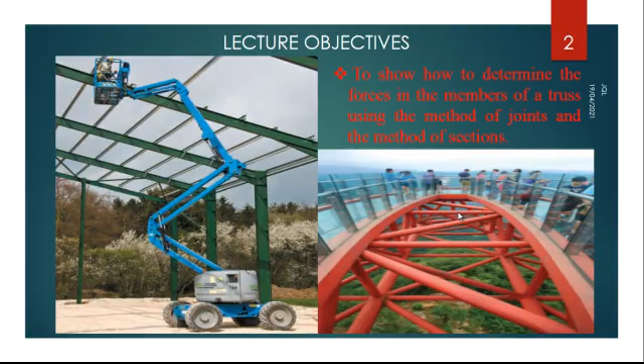Introduction. Definition: a structure refers to a system of connected parts used to support loads, such as buildings, bridges, dams, towers, and so on. Structural analysis is the design of the performance of a given structure under prescribed loads or other external effects such as support movements and temperature changes.

So as we analyze or design our trusses or structures, we consider the supports, right? Of course, you try to avoid those movements, and there's also the effect of temperature. But this course will not consider temperature changes. The component that includes temperature changes on a body or structure will be done, I think, in the second term, under strength of materials.

Structural engineers analyze and design new structures, investigate the capacity and serviceability of existing structures, develop retrofit methods for existing structures with inadequate capacity, and carry out forensic investigations and research and development.

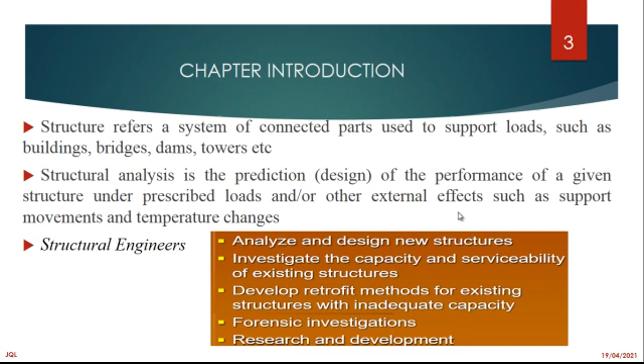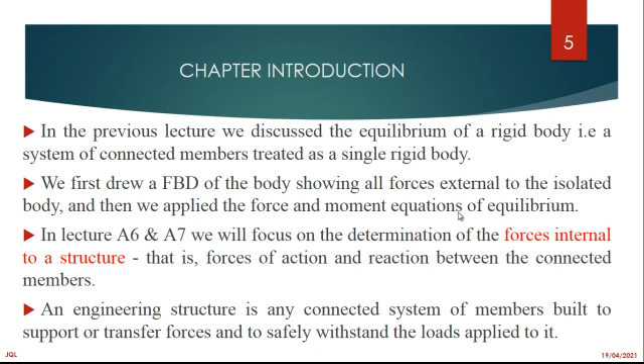In lecture 6 and 7, we will focus on determination of the forces internal to a structure, that is, forces of action and reaction between the connected members. An engineering structure is any connected system of members built to support or transfer forces and to safely withstand the loads applied to it. To determine the forces internal to an engineering structure, we must dismember the structure and analyze separate free body diagrams of individual members or a combination of members. This analysis requires careful application of Newton's third law.

If you can remember, I mentioned Newton's laws, but when we are doing a structure analysis, we always need to remember and apply Newton's third law, which states each action is accompanied by an equal and opposite reaction. Let us not forget about this. In this chapter, we will analyze the internal forces acting in several types of structures. These are trusses, frames, and machines. But just for this first lecture in terms of structure analysis, we are only going to look at trusses.

In this treatment, we consider only statically determinate structures, which do not have more supporting constraints than are necessary to maintain an equilibrium configuration. What this simply means is the type of problems that you are going to encounter will only have a situation where you find an equal number of unknowns to the number of equations. You won't have a situation whereby you have more unknowns than the number of our equations of equilibrium.

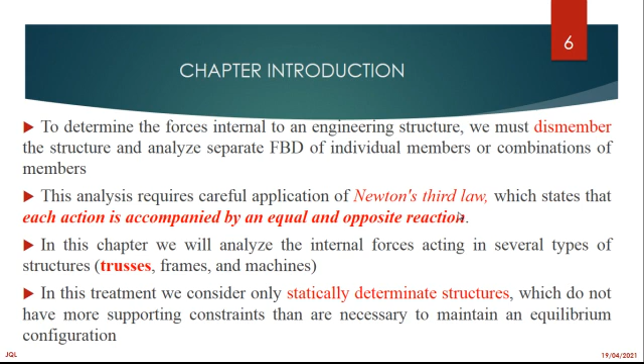The analysis of trusses, frames, machines and beams under concentrated loads constitutes a straightforward application of the material developed in the previous lecture. You can remember, you can analyze a building, you can analyze a structure in terms of equilibrium. So we are going to use the same principles and the same tools that we already developed from the previous lectures to analyze our members, to analyze our structures. The only difference is we will now be looking at the internal members. From the previous lectures, we were just looking at the external supports. This time, it will be both the external and internal. The external will be the supports, and the internal, each member, you are supposed to analyze the force within each member making that rigid body.

So in this lecture, only trusses will be discussed. The basic procedure developed in lecture A03 and A05 for isolating a body by constructing a correct free body diagram is essential for the analysis of statically determinate structures. Recall, I had emphasized that you find time and read chapter 3 from our famous book, that is Russell, 14th edition, where you are supposed to appreciate and understand how to draw free body diagrams. If you understand how to draw a free body diagram, this will be your tool. Without a free body diagram, it will be very difficult for you to analyze any member, any structure. Therefore, you need to remember how to draw a correct free body diagram. This is the first step when you are analyzing a structure.

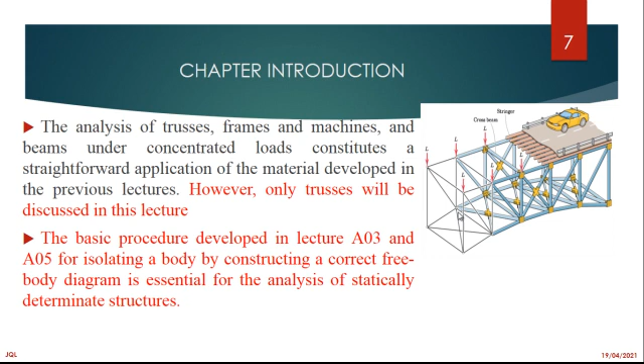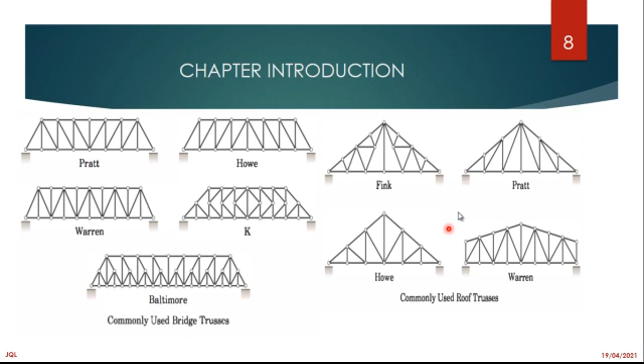Here, I'm just showing you some examples of trusses. These are the names of the common trusses that have been used for bridges. And these on the right are trusses that have been used for most of the roofs that you see on buildings.

A planar truss is one where all members and nodes lie within a two-dimensional plane, while a space truss has members and nodes that extend into 3 dimensions. So, in short, a planar truss is in 2 dimensions, a space truss is in 3 dimensions. Here I'm showing you an example of a 2D truss, while here I'm showing you a tower, those normally used for communication, like those for Airtel, Zamtel, and MTN. This one is a 3D structure, while the one on top is a 2D structure.

So, the top beams in a truss are called top chords and are typically in compression. Here I'm showing you some upper chords which are normal. It's not always, depending on how the loads have been applied. But the way it is, where it is only being supported at the far and the first end, chances are high that the upper chord will be in compression, while the bottom chord will be in tension.

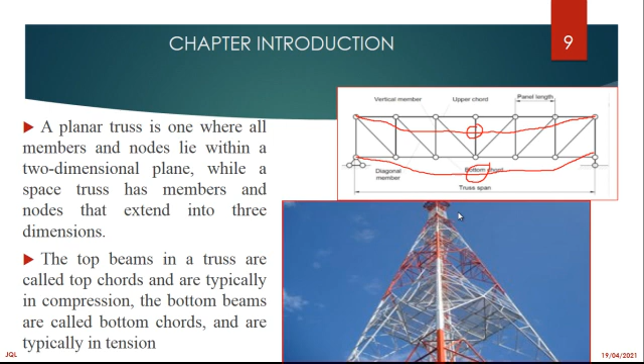We are going to start with a plane truss. This is just a truss in 2D. We just consider the X and Y axis. A framework composed of members joined at their ends to form a rigid body is called a truss. Or a truss is a structure composed of slender members joined together at their end points. Slender in this case would mean the thickness of that member versus the length of that member.

You divide the thickness over the length. If you are going to get something less than 0.025, then it's a slender member. But if you find something that is more than that, it's no longer a slender member. You understand this about slender members in third year and fourth year; those who are going to do designing of columns, they'll explain what a slender column is.

Bridges, roof supports, derricks, and other such structures are common examples of trusses, as I've shown you on the other slide. Structural members commonly used are beams, channels, angles, bars, and special shapes which are fastened together at their ends by either welding, rivets, bolts, pins, or any other connection. When the members of a truss lie essentially in a single plane, it is called a plane truss. As I earlier alluded, these are just trusses in 2D, X and Y axis.

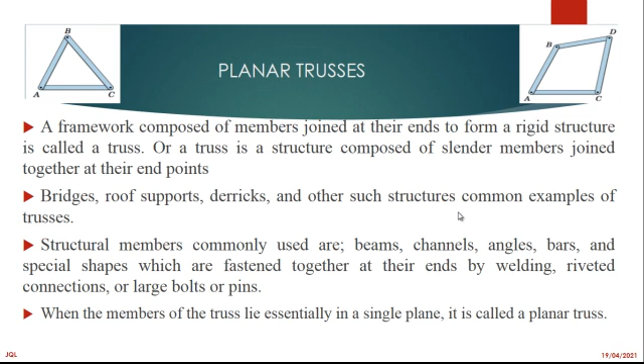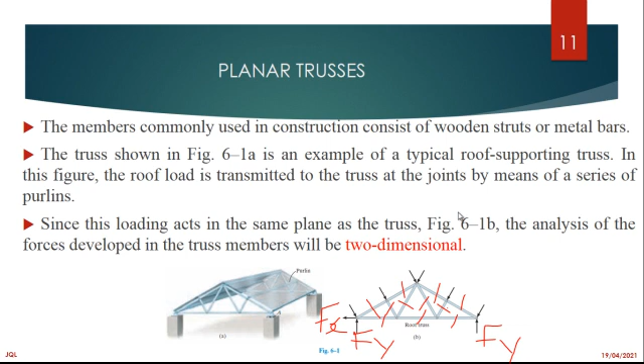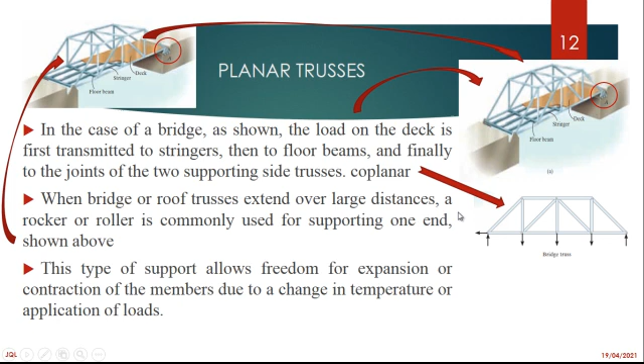When we are analyzing our members of a truss, we make certain assumptions. So, to design both the members and the connection of a truss, it is necessary first to determine the force developed in each member when the truss is subjected to a given load. To do this, we will make two important assumptions.

One, the members are assumed to be connected only by frictionless pins. Two, the loads must be applied at the joints. The loads must be applied at the joints, not anywhere. Because of these two assumptions, each truss member will act as a two-force member.

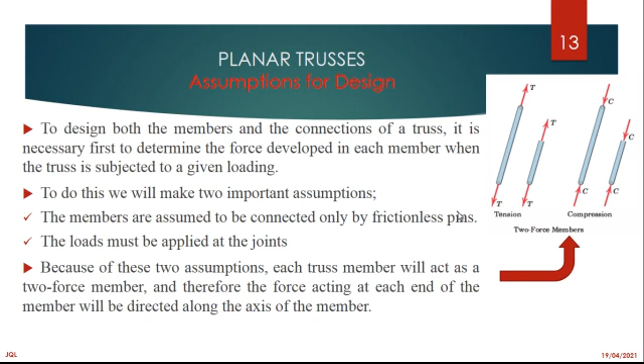The other one showing you C is showing you that this is compression. This force is trying to reduce the length of the member. That is compression. So each and every time, we are supposed to know whether our member is in compression or in tension. If the force tends to elongate the member, it is a tensile force, whereas if it tends to shorten the member, it is a compressive force.

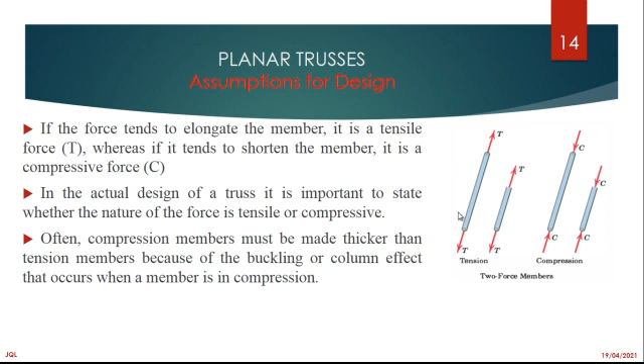In the actual design of a truss, it is important to state whether the nature of the force is tensile or compressive. Often compression members must be made thicker than tension members because of the buckling or column effect that occurs when a member is in compression. You'll understand better in third year and fourth year when you start designing, for example, columns.

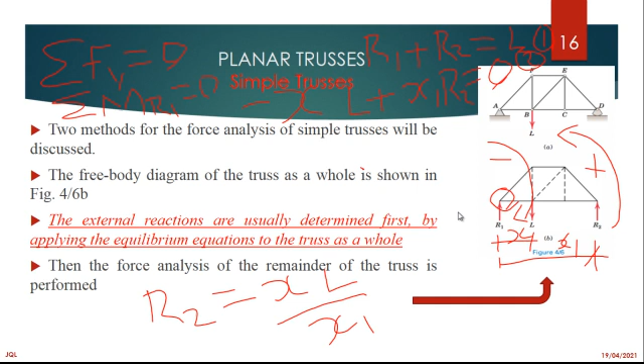Once you have your R2, you go back to your R1 plus, that is xL over x1 R1. No, this is supposed to be R2, not R1. This is supposed to be R2. Sorry for that. This is supposed to be R2. Right. Yeah. This is how you are going to find the reactions, that is the R1 and R2. Hope this is clear.

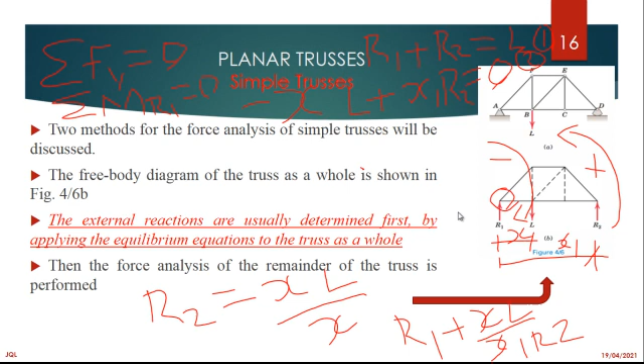The first method that we are going to use, as we are going to be analyzing our simple trusses, will be the method of joints. In order to analyze or design a truss, it is necessary to determine the force in each of its members by applying the method of joints.

Hence, if the free body diagram of each joint is drawn, the force equilibrium equations can then be used to obtain the member forces acting on each joint. Since the members of a plane truss are straight two-force members lying in a plane, this is 2D, each joint is subjected to a force system that is coplanar and concurrent. As a result, only summation of forces in the X and summation of forces in the Y need to be satisfied for that equilibrium.

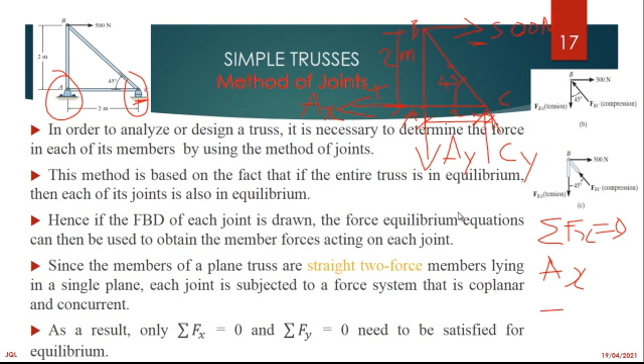When you look at the direction of Ax and the direction of 500, you say going to the left. These are forces, these are not moments, these are forces. Going to the left, I'm going to say is positive. Going to the right, it's negative. So here Ax is positive, then minus 500 Newton equals 0. Then you find your Ax.

You do the same, you go to the summation of forces in the y is equal to 0. Again, going down, let it be positive. It depends what you want. Then going up, it's negative. You have got two unknowns there, right? You have got Ay and Cy. So, in short, Ay is equal to Cy. But how are you going to get Ay or Cy?

You are going to apply now summation of moments. Summation of moments about A is equal to 0, or summation of moments about C is equal to 0. Then you would find your Ay and you'd find your Cy.

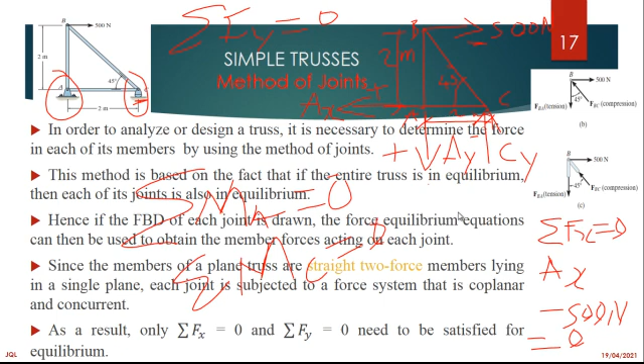When using the method of joints, always start at a joint having at least one known force and at most two unknown forces. So in this case, we have got A. If I can remember what I drew, here we are going to have a force that is Ax, here another force that is Cy, and here another force Ay. So at A, in fact, I'm going to have 4 unknowns.

Which 4 unknowns? The other one is FAB, this force. The other one is force AC. So I'm going to have FAB, FAC, Ax, and Ay. So here you have 4 unknowns. It is very difficult to solve that problem because we only have 3 equations: summation of forces in the x, summation of forces in the y, summation of moments about C or about B. 3 equations, 4 unknowns.

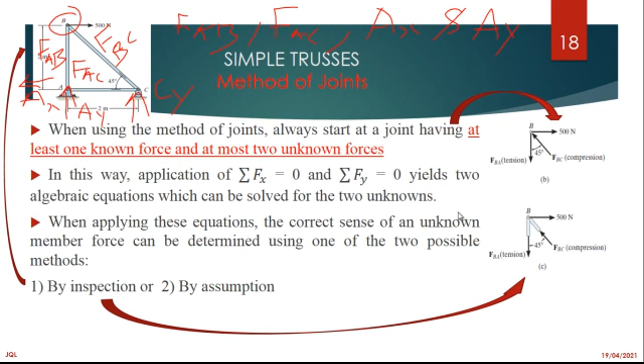When you go to C, you would find there is another force, FBC, and Cy and FAC. 3 unknowns, right? So the easiest way is to go where you have got one known force, which happens to be point B. So you can see from this example, they started with point B, where we have a 500.

So where this came from: after you came up with a free body diagram of the truss as a complete structure, you now dismantle. What do I mean by dismantle? You are going to get member AB. This will be force AB. What do we have? There's a pin connection there, right?

Then you have another member there. This is Ay, this is Ax, right? We have those forces there, and at the same time, we are supposed to have forces within the member itself. And here you can remember that there is another 500. So from here, you now get the forces within the member itself.

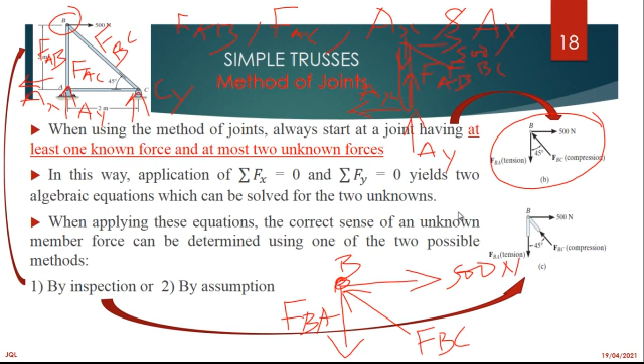When you do your calculation, you will find that the directions of the forces that we have put there are correct, because it makes sense. We have used the principles of equilibrium on a given point. This comes from the fact that if the whole body is in equilibrium, all members, all joints, all points are also in equilibrium. I think I've already explained method number 1, that is by inspection.

A positive answer indicates that the sense is correct, whereas a negative answer indicates that the sense shown on the free body diagram must be reversed. Take note of this. If you find a negative force, the assumption that you made was not correct. You need to reverse. If the force was negative and your assumption was tension, change that to compression. And that also applies if your assumption was compression.

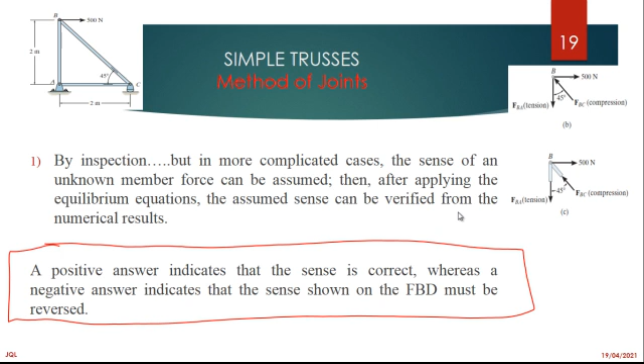The second method is by assuming the unknown member forces acting on the joint's free-body diagram to be in tension.

If this is done, then numerical solution of the equilibrium equations will yield positive scalars for members in tension and negative scalars for members in compression. Once an unknown member force is found, use its correct magnitude and sense, tension or compression, on those subsequent joint free body diagrams.

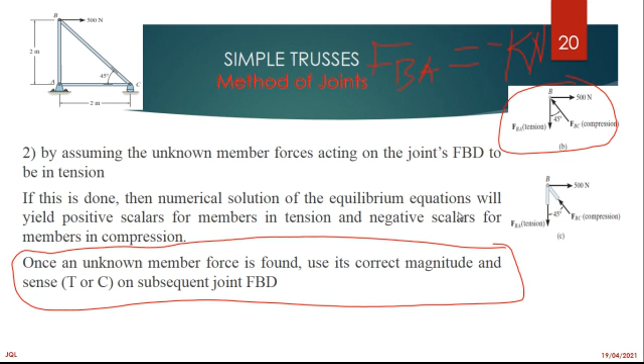What this means: if the assumption that we made on B, then we find that FBA is giving us negative whatever figure, let me say maybe negative K Newton, right? Then I know that the assumption that I made was not correct. So I'm supposed to reverse. I put the force to be in that manner.

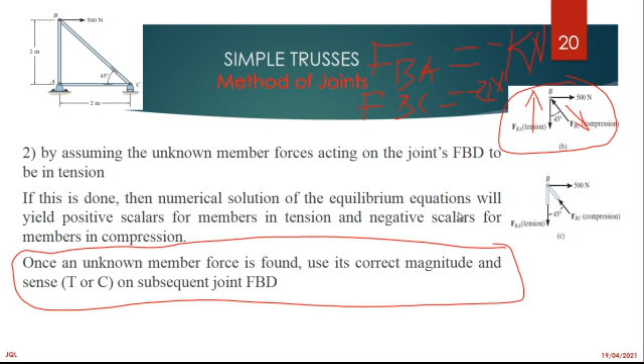This also applies if I find FBC to be negative, maybe say Z Newton. That's just an example. I'm supposed to change the sense, the direction, to be like that.

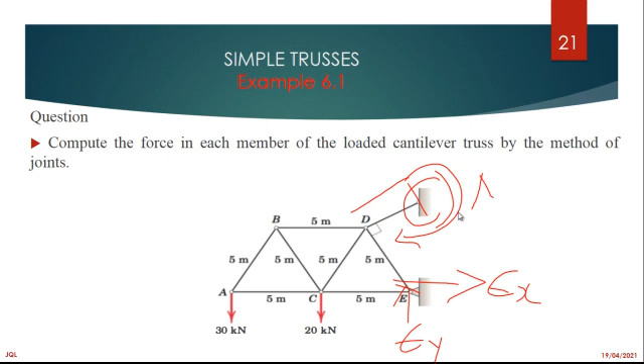But when you look at this joint here, that joint is showing you that they are supposed to have a moment there, because that looks to be fixed, right? So if it's fixed, they're supposed to have a moment, a force there and another force there. But you have been told to compute the forces in each member. The easiest way, I would start with joint A. It's very easy. If you want, you can still do it the other way. But for me, I would say you start with joint A.

So joint A, I'm going to have a force that is 30 kilonewton. Then I have another force there and another force there. Right? So from my inspection, force AB, is it going to be in tension or compression? When I say summation of forces in the Y, I already have got a force which is 30, facing downwards. So the only force which would counteract the 30 kilonewton is force FAB. So in this case, it's supposed to be in tension. Then I come to my force AC.

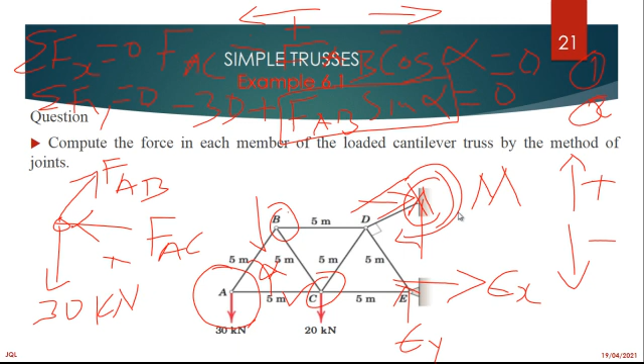Right? You already have the AB. You want to find the BD and BC. You have two equations and you have got two unknowns. You can find that. You do the same. Once you find this, then you come to this joint which is C. Then you know this one, you know this one. The unknown is just that and that. You have got two equations and two unknowns. Once you get that, then you come down there. Or you come here. Since you already know this one, the only unknown will be this one and that one. Then you are done.

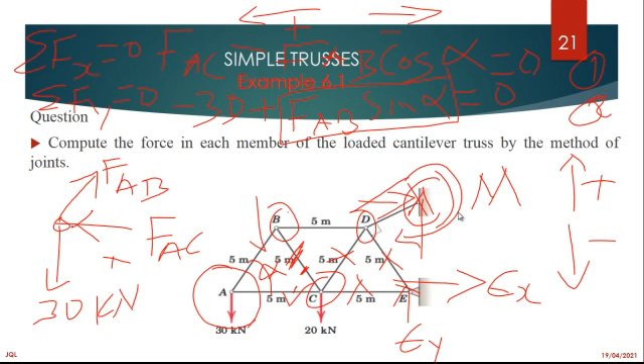I think I've already explained. The way they did this, they first came up with a free body diagram, as I earlier told you. You had the force there, a 30, you have a force there, a 20. Then I told you that where you have there at E, you are going to have two forces. Then at this joint, I said there's a moment, and there's a force, and another force there. Right? But you can still find the force in each member without considering that.

But for those who would want to do some experiments, you can use that method by finding the forces there and the forces here as your free body diagram. You're still going to find the same answer. But for me, I showed you that you can still find the members, that is AB and AC, even without drawing the free body diagram for the whole structure.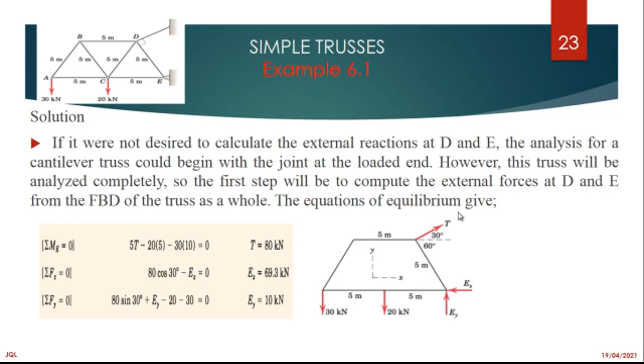Just like I have explained, you always need to apply our equations of equilibrium, that is summation of moments, summation of forces in the X, summation of forces in the Y, for us to get whether the force in that member is in tension or compression. I think I've explained how you get that.

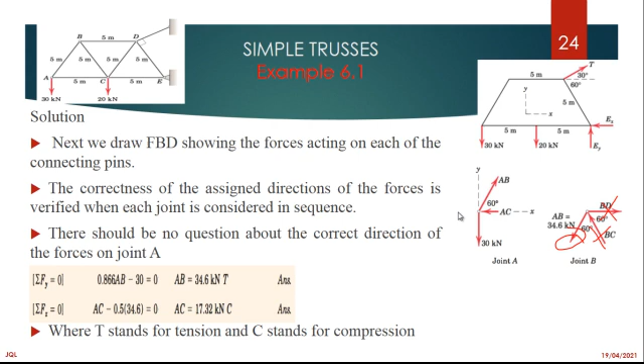The first step was at A, then the next step went to B, because at B we already know this, right? The only thing that you are looking for is this and that, right? That is summation of forces in the Y, summation of forces in the X. Then from there it goes to, I think that is C, right? Because at C, we already know that guy. I also know this guy, right?

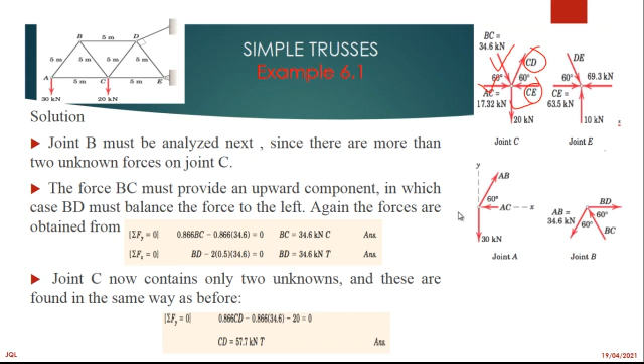And we know this one. So the unknown is this one, and that one is CD and CE, and so on. Then you are done. You find all the forces within those members. This is how simple it is. The same principles, always don't forget.

Don't forget the issue of the signs, positive or negative. You need to agree, and you need to be consistent. If you say this direction is plus, let it be plus throughout your calculations. Don't change. Then of course that would be negative. And if you agree that going down it's a minus, be consistent throughout your calculations.

Don't forget about that. Always apply our equations of equilibrium, and don't forget about signs, positive, negative. Whether it's a moment, if you agree, this will be positive or that will be negative. Don't forget. Be consistent as you are doing your calculations. Don't change. Just be consistent.

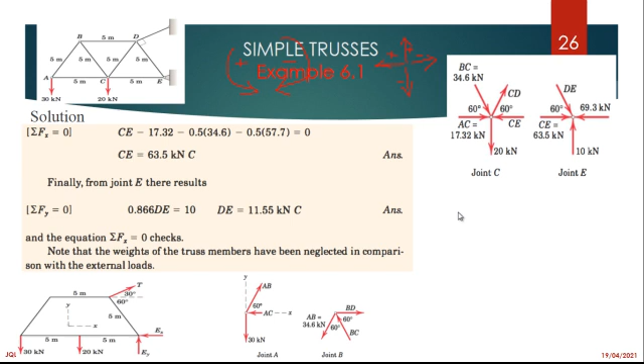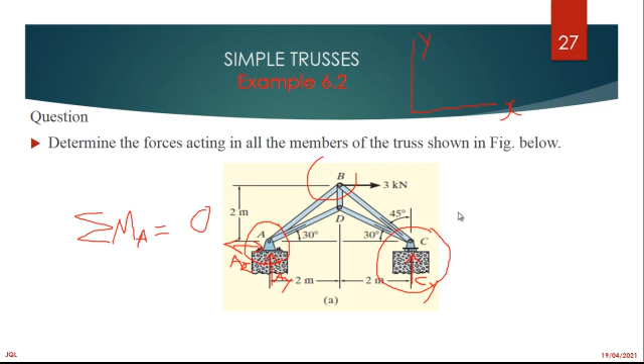Once I have the reactions, I choose whichever joint, A, B, or C, apply the equations of equilibrium, then you are done. You have got only two unknowns, this one and that one. But even with the method that I've done, you will still get the same answer. So there is some flexibility on how to start or which joint to start with.

At some point, you can even start with joint B. You get stuck there. But when you get stuck, it does not mean that is the end. You are going to have equation 1, equation 2, equation 3 with 3 unknowns. You are not stuck. Then you move to the next joint, maybe A. You go to A, you are going to find maybe the force in AB. Then you go and replace in the equations that you made under joint B. So it's very flexible.

Whichever joint you start with, but also consider time. Follow the instructions. I think from the instructions here, it stated to start from a point where there is a minimum number of members and one known force, which happens to be this. But still, I started with this one. You can still get the same answer. Even when you start with joint B, you still get the same answer. But you consume too much time. When you start with joint B, you spend a lot of time, but you still find the same answer.

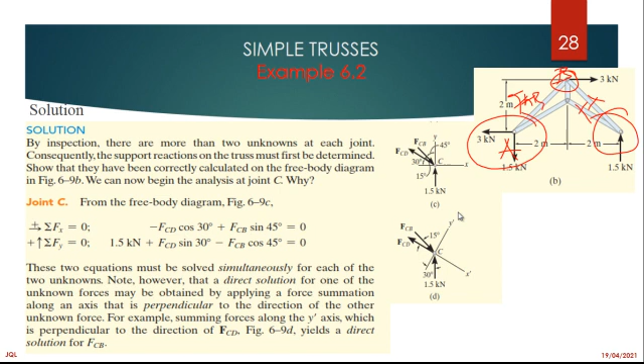I think this is clear, as I've explained. Here they are giving you signs. When you go that side it is positive, when you go that side negative. This is how they are coming out with the negative, positive, negative, and whatever, which also applies there. When it goes to the right, these are your own assumptions. You make your own assumptions. The only thing that you need to do is just be consistent. Don't forget.

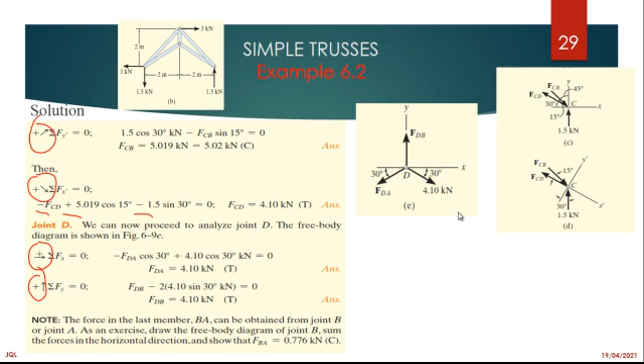For summation of forces in the y equals to 0, which components do I have? I think I've done that here. We're going to have 1 there, and here I said 1 the other side and 1 the other side. So this was our Fy, and this is our Fx. This is our Ey. So here, already I know this component. And I said that positive, that negative, then that positive, that negative. Right? The components in the y.

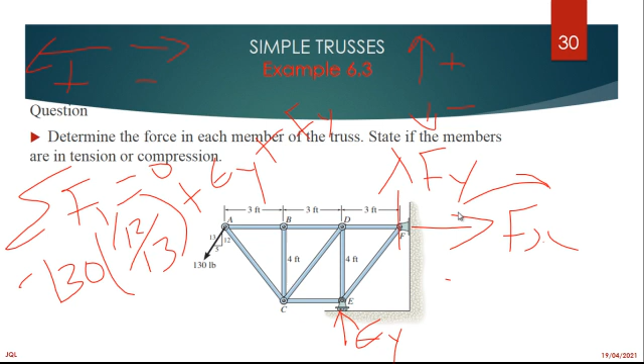I will start with the 130 pound. 130 pound, the direction is facing downwards. So it is a negative 130 times the component that I'm getting. In this case, it is the vertical, which is a 12 over 13. Right? Then you go to the next. The next y component is the E, which is a plus Ey. The last component is facing upwards, which is also a plus. Plus Fy is equals to 0. You have got 2 unknowns, Ey and Fy. Right?

Then you can come now to summation of moments. You have got 2 unknowns, which is Ey and Fy, this component and that component. So for me to find these unknowns, I'm supposed to make sure that where I get my moment, I get rid of one unknown. So I can do summation of moments about E. When I do summation of moments about E, the component Ey is passing along where I'm getting the moment, so it's 0. The only unknown I'm going to remain with is Fy.

Or if I do summation of moments about F equals to 0, what is going to happen? The force Fy is passing along where I'm getting the moment. That simply means Fy becomes 0. I'm going to have only one unknown, which is going to be Ey. That's how you can get Ey using this, or you can get Fy using that. This is how simple it is. Once you have the reactions at F, at E, right?

Then the next, which joint can you use? Which joint? For me, I can say I would go to A, because at A I've got two unknowns and one known. When I find that, I come to B. I already know that unknown. When I'm done with that, I can come to F. If I go to F, I already know Fx, Fy. There are only two unknowns, this and this.

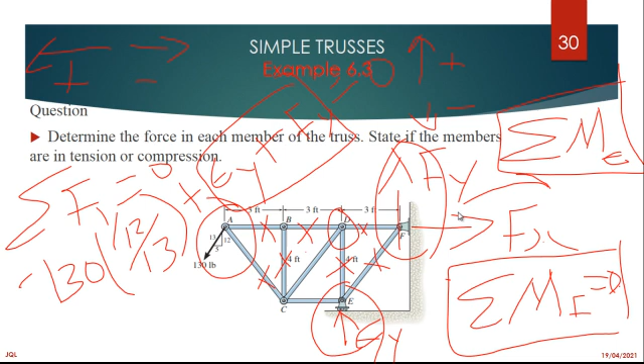Right? Once I get that, then I come to D. At D, I'm going to have two unknowns, which is DE and DC. Right? Then the last one will be which one? It's either I come to C or I come to E, because the only unknown is CE. You are done. You get your 20% in a test or in an exam.

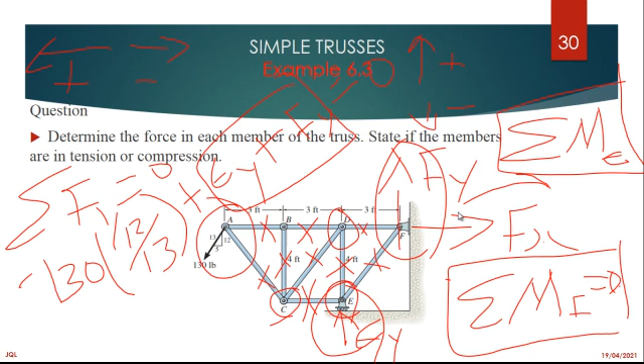These are just the solutions anyway. This is how they get those solutions. Summation of forces in the y, summation of forces in the x, these assumptions, let us not forget. We assume up positive, whichever makes you comfortable. Somewhere you get stuck. You end up using the third equation, which is summation of moments about some point, where you are going to have two unknowns and only one equation. So you need to create another equation so that you have got the equal number of unknowns and equations.

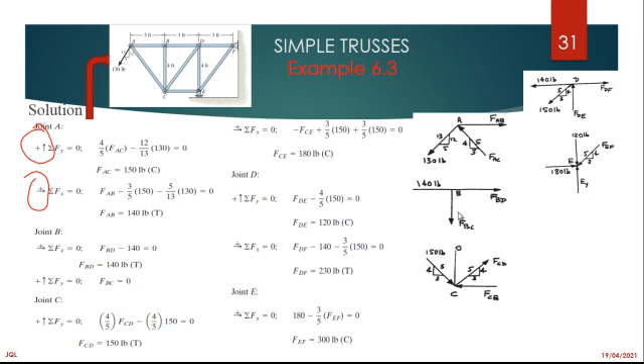Zero force members. Truss analysis using the method of joints is greatly simplified if we can first identify those members which support no loading. These zero force members are used to increase the stability of the truss during construction and to provide added support if loading has been changed. The zero force members of a truss can generally be found by inspection of each of the joints. For example, consider the truss shown there. You draw the free body diagram at point A, this point.

It is seen that members AB and AF are zero force members. The reason there is very simple. When you look at joint A, when you do summation of forces in the X, you will find force AB is equal to 0. When you do summation of forces in the Y, you would find force AF is equal to 0. So these members are zero force members.

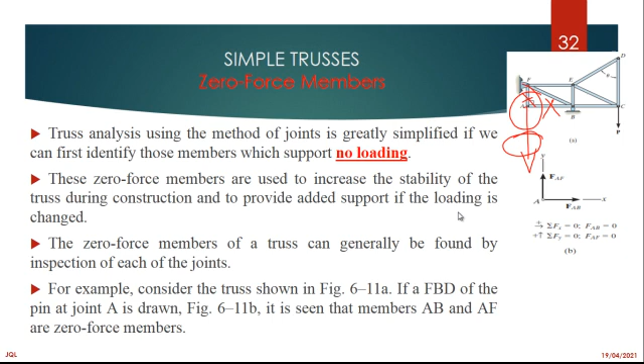So whenever you find any truss with that type of connection, just know that those two are zero force members, unless there is an external force applied on that joint; then it will no longer be a zero force member. Why? Because when you do summation of forces in the Y, you are going to have another component that is going to counteract the force FAF. Right?

Note that we could not have come to this conclusion if we had considered the free body diagram of joints F or B. Meaning, if we considered this, your assumption could not work. But after you do your calculations, you will still find that your force AB or AF is still 0.

In a similar manner, consider a free body diagram at joint D. Here again, it seems that DC and DE are zero force members. Why here are they zero force members? They are zero force members because of the way the designer had put the axis. He had said allow ED to be the x-axis, then that to be y.

When you do your summation of forces along the x and summation of forces along the y-axis, you would find that there is no counteracting force in DE. Hope this is clear. This is simply because of the way the designer had put the axis; along the x-axis, that was DE. So when you do your summation of forces in the x and summation of forces in your y, you would find that they are zero force members.

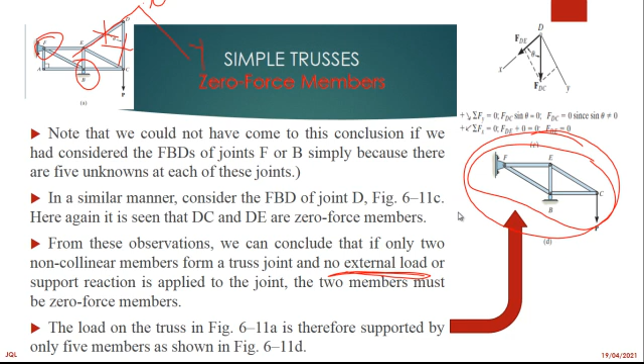Now consider the truss shown above. The free body diagram of the pin at joint D is seen in figure B, which is that. By orienting the y-axis along DC and DE and the x-axis along DA, here, because there's 90 degrees there, that is your x and that is your y. It is seen that DA is a zero force member, which happens to be that member. Note that this is also the case for member CA.

In general then, if 3 members form a truss joint for which 2 of the members are collinear, the third member is a zero force member provided no external force or support reaction has a component that acts along this member. This is just the same as the statement that I just explained on the previous slide. The truss shown here shows you the members that are supporting load.

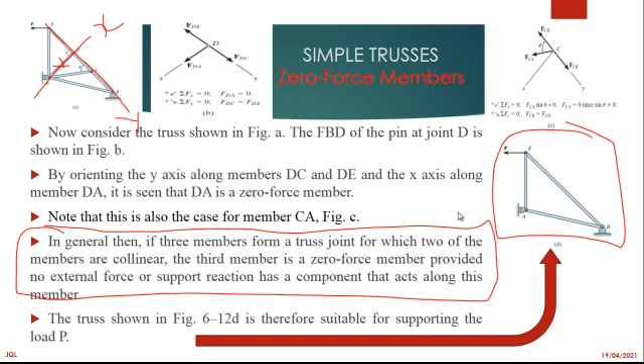Find time to prove that these conditions make sense. Try to do some calculations to see if you really find them as zero, not from the assumption that I'm making. Try to find the force in member CA without the assumption that it's a zero force member. And for real, you will find that it is a zero force member. You would find that even if you remove that member, nothing will change. It is a zero force member.

This is the first part of structural analysis. This is lecture A6. We have gone through the method of analyzing trusses, which is the method of joints. And of course, I've given you some introduction and also some practical applications of trusses. In the next part, we are going to look at how to analyze trusses using the method of sections.

Then we'll look at not only planar trusses, but we'll also solve problems such as space trusses or 3D trusses. Again, we'll also look at statically determinate trusses, internal and external redundancy, just as we did in our lecture A5, where we looked at the equilibrium of a rigid body. I end here.